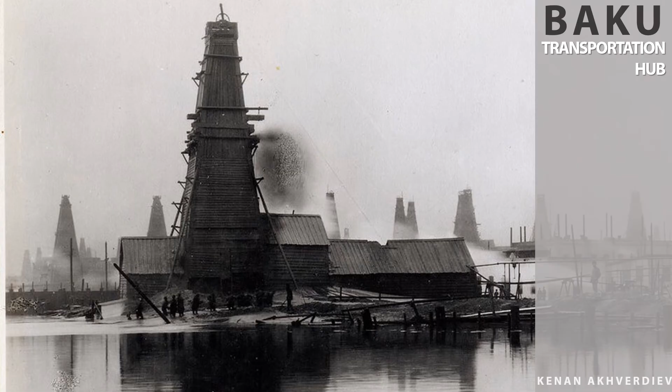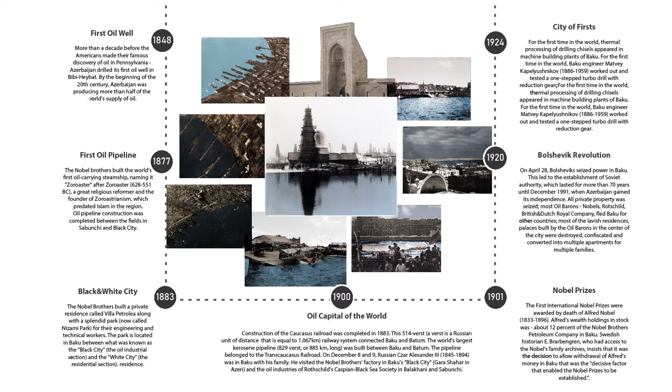Located on the Caspian Sea in the South Caucasus region, Azerbaijan is known as Land of Fire for its oil and gas reserves. Baku is the oldest and most developed city in the region. It is renowned for its harsh winds, which is reflected in its nickname, the City of Winds.

Development of the oil industry divided Baku into two parts, known as historical Old Baku and the petrol industry region, which was called Black City. This ironic name was given to that area to represent how smoke and fumes affected the overall look, how buildings were covered with black stain.

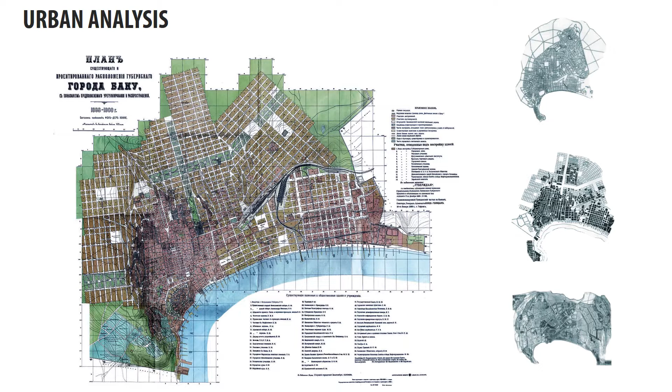In the early 20th century, oil and petroleum was first stored, then transported from the railway station located in the Black City. In fact, the first railway construction and subsequent development in Azerbaijan was directly related with the transportation of oil.

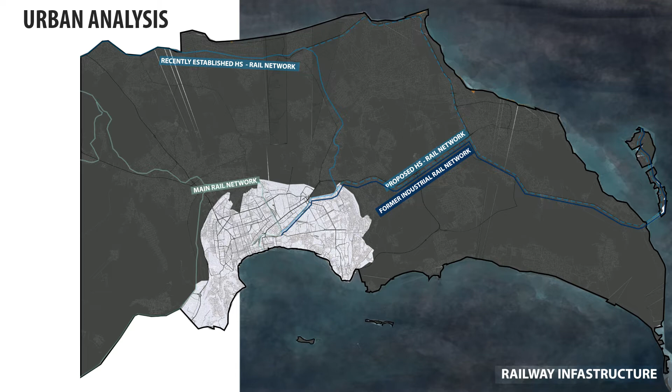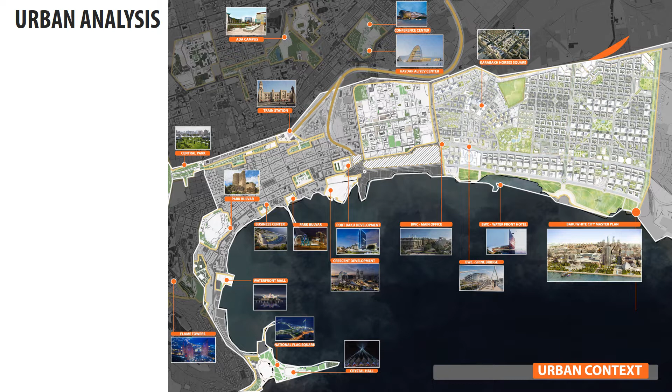The recent oil boom provided Azerbaijan with a large amount of income, which was used to create new commercial areas and development of the city. About 25% of all inhabitants in the country live in Baku's metropolitan area. Baku is the sole metropolis in Azerbaijan.

Various connections are used to create logistic and touristic routes throughout the capital. Local rail transport includes Baku Funicular and Baku Metro, a rapid transit system notable for its arts, murals, and mosaics. The commuter ferries, along with the high-speed catamaran, sea bus, and Baku Harbor form the sea transport.

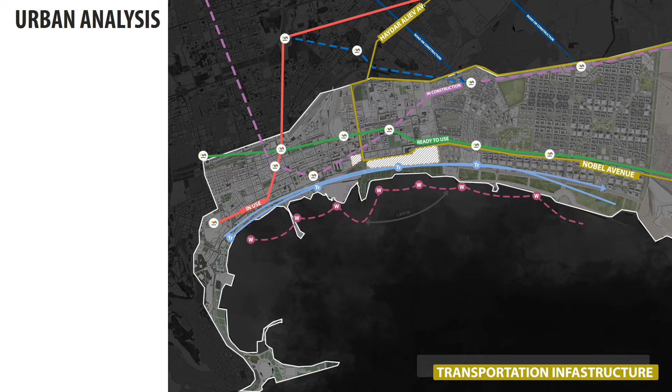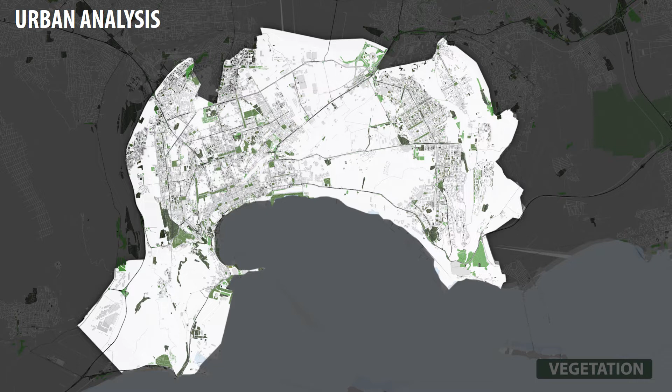Baku has large sections of greenery, either preserved by the national government or designated as green zones. Baku Boulevard is a pedestrian promenade that runs parallel to Baku's seafront. The city, however, continues to lack a green belt development as economic activity pours into the capital, resulting in massive housing projects along suburbs.

Nowadays, a unique opportunity for the restoration of the Black City area has arisen on an industrial site, which is located directly at the center of Baku Bay and to the east of the city center. The master plan, surrounded by a dynamically developing city infrastructure, has a chance to be reborn for a new purpose.

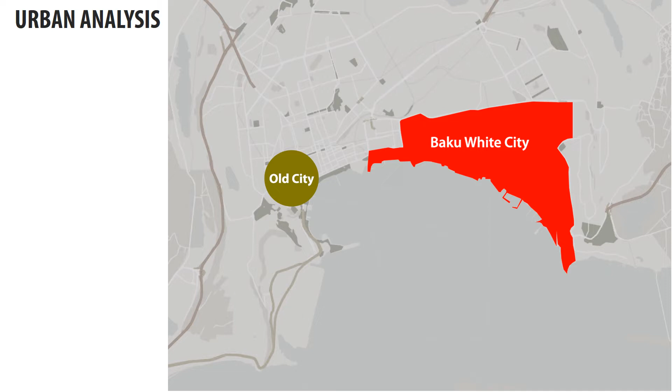My project scope is to cover the junction between the old part and the Baku White City. In fact, in this area it was decided to build a new shopping mall in the master plan. Besides that, existing rail platforms in the area were a hint to design a new railway station.

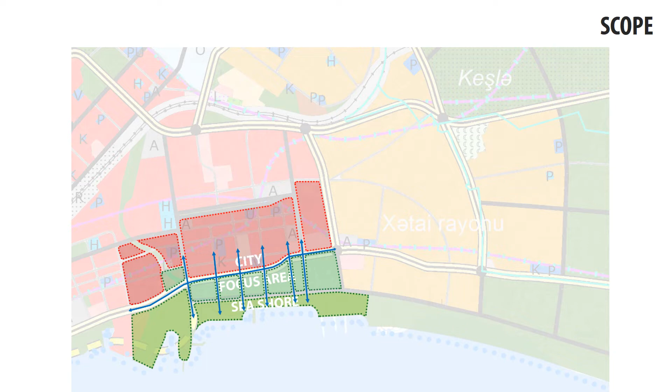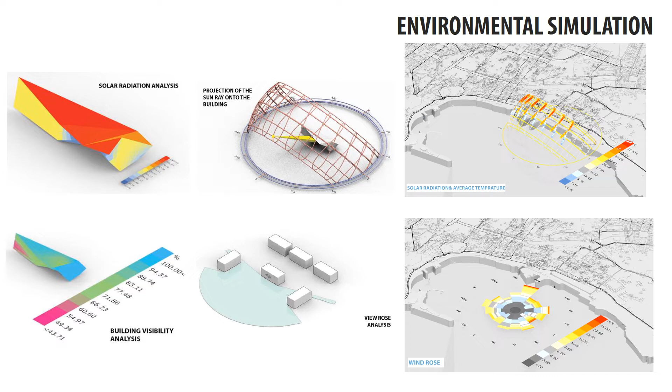Site location, topography, zoning, traffic conditions, and climate were critically examined for any change to future developments, site surroundings, and changing cultural patterns. Although analog tools, simulation was an essential part of my design for predicting performance of design options related to urban space and building forms.

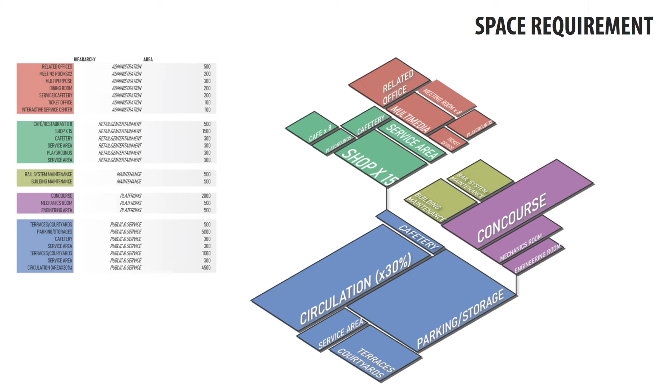The transportation hub building program at first seems easy to put together. Nevertheless, given the amount of area that will be covered, the hub consists of 5 portions, which are administration, public service, maintenance, concourse, and retail areas. These charts not only represent which area coverage every space requires, but also give understanding of what kind of hierarchy the space will have according to public and privacy issues.

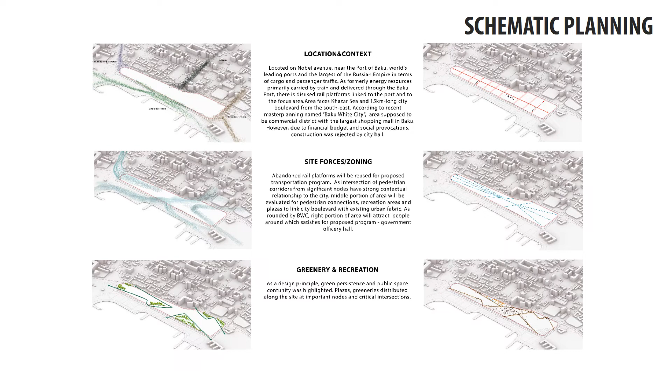As mentioned, the area is supposed to be a commercial district. However, due to financial budget and social provocations, construction was rejected. Moreover, abandoned rail platforms will be reused for the transportation program. As a design principle, green persistence and public space continuity was highlighted.

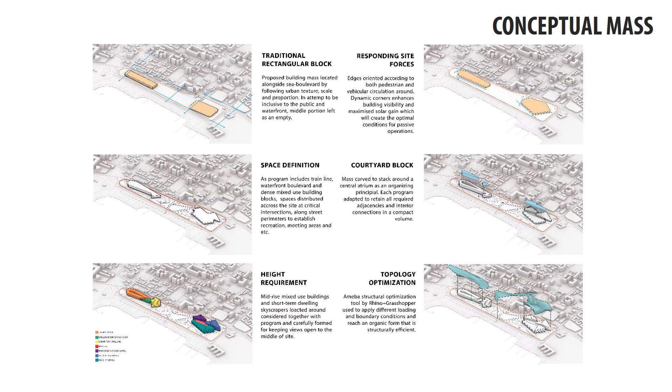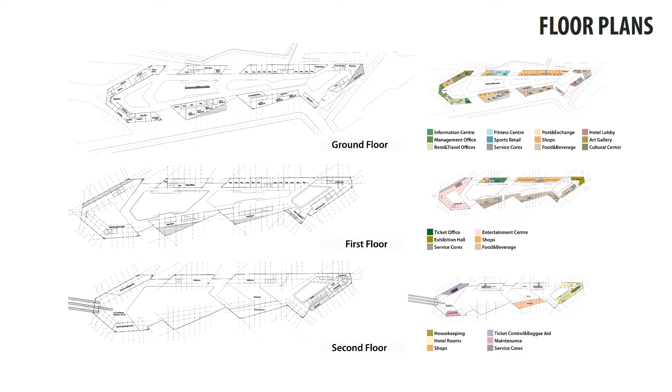The proposed large volume is shared in a single roof. By keeping the floor as open space, the external area allows visitors and passengers to bypass the area easily, while not interfering with the circulation of the building. To ensure regular foot traffic, the building can be accessed through 3 different entrances.

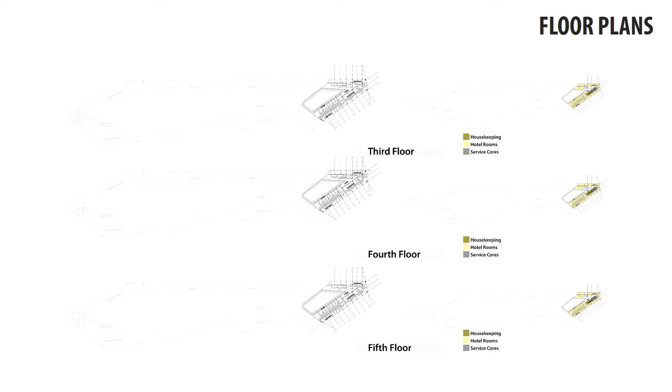The hotel area starts by the lower glazing surface where the functions are stacked around the central atrium. The hotel consists of 140 guest rooms in 6 floors. In order to serve both internally and externally, some room types allow the sunlight from the atrium.

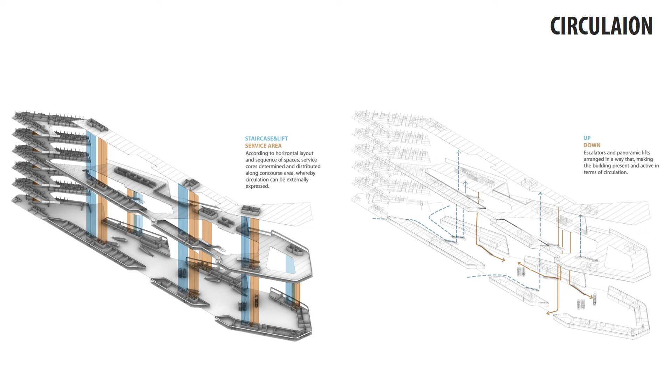Service cores are determined and distributed along the horizontal concourse area, whereby circulation can be externally expressed. Moreover, escalators and panoramic lifts are arranged in a way that makes the building present and active in terms of circulation.

The concept of design was transparency and an urban dialogue with the city. Transparency is translated by the monumental vault, constructed of glass and steel, creating a building without facades, relying on the roof for shelter and the building's identity.

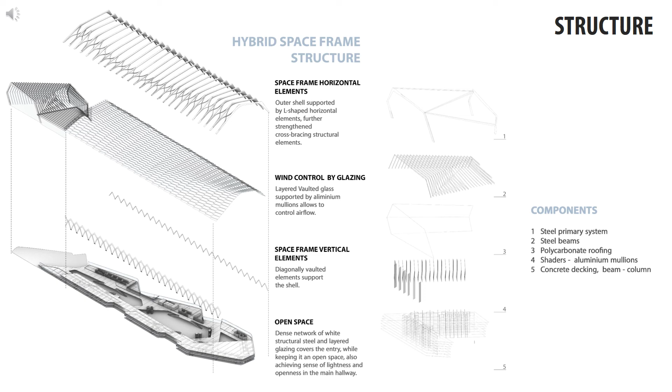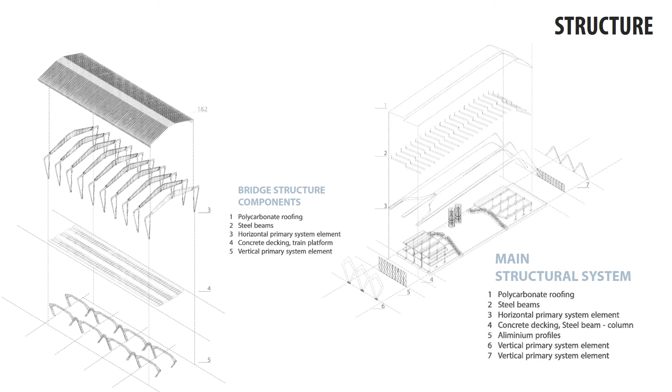This glazed transparent umbrella lets plenty of natural light in throughout the day, and it's slightly tinted to provide protection from the sun's harshest rays, to make integration between the interior and the surrounding environment.

The use of curves and layered glazing throughout the roof is meant to resemble the air movement of high speed and to control wind flow, which will help to decrease the amount of load by resistance of the column and to make the public concourse clear.